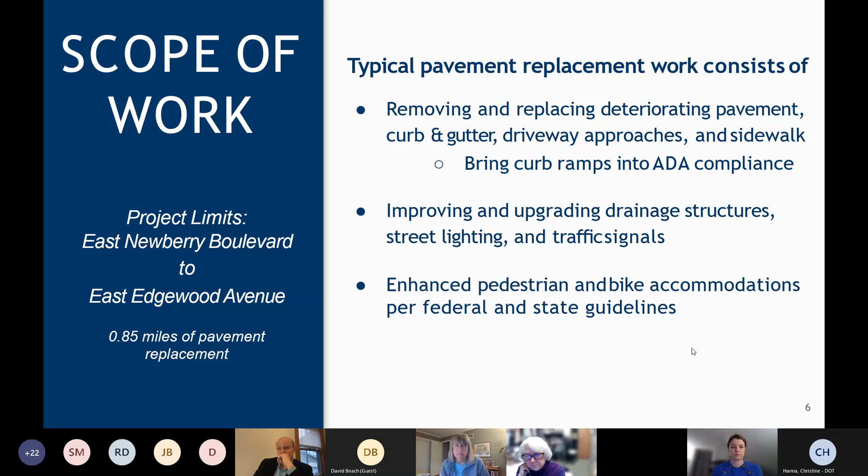So we're going to be talking about the cost so everybody's aware of where it stands today. The current construction cost is between $5 to $6 million. From the design perspective, 75% of the cost is covered by the state and 25% is covered by the City of Milwaukee. Now for the construction cost, 78% is covered by federal and state funds and 22% is covered by the city, and this is due to the parking being covered by the City of Milwaukee.

Okay, so here's the project schedule. If we go back, like I just mentioned earlier, July 15 was the first public involvement meeting. And in January, we submitted the 30%, which is a very preliminary design phase of the project. Today we have 2 meetings, or this week we have 2 meetings. Today is the virtual, and tomorrow we're having the in-person public involvement meeting.

Also in October of this year, we'll be submitting the design study report and the environmental document. I just want to emphasize, tomorrow the in-person meeting is going to be located at UWM campus from 6:30 to 8:30. We'll have a handout and some notes in the end in the chat box.

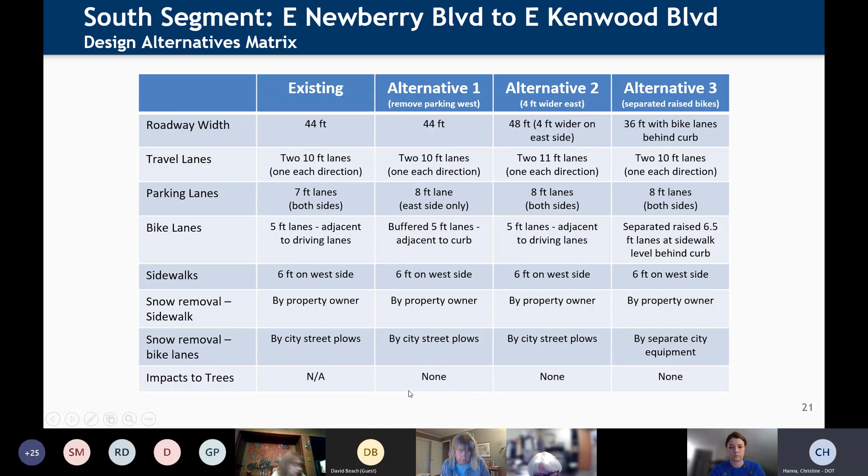So this is where we come in. I went a little too fast for this, but I want the majority of this meeting today to be focused on your feedback. How would the proposed design work for you? What did you like about it? What didn't you like about it? Is there anything you wanted me to go back and ask more questions about? Does this proposed design reflect what we heard from you at the first public involvement meeting last year?

Do you have any information or comments regarding the historic preservation that we may not know about, or additional feedback, or questions in that regard? Also, which design alternative for the south segment would you prefer? Because the north and middle don't really change - it's the south segment that has the three alternatives we just discussed.

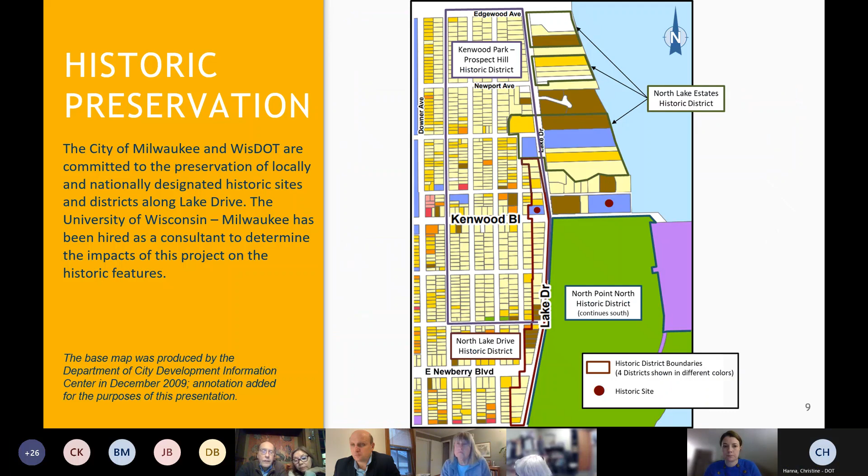We actually looked into that. Let me just go to the slide. You're talking about the north segment, correct? Unfortunately, we looked into that, but the trees as you see them today have deep roots, so anytime you disturb that area, you put it at a higher risk of the roots being impacted, and therefore those mature trees will no longer exist. So it's a higher risk, and we made sure to have enough width that complied with state and federal guidelines.

So the shared parking and bike lanes on the road are safer and more user-friendly, I should say. We have incorporated a separated bike lane where we actually can; otherwise the impact will not be good. And finally, like others have stated, we really don't want to widen the road if we don't have to, because we want to also address the reckless driving going on in that segment. So there are a couple of reasons why we have avoided that.

I don't know if Sam, do you want to add anything else I may have missed from your design perspective? Yeah, one thing you said that's pretty accurate is that the moment the curb is removed and we move it into the terrace area, the root system of these mature trees grows all the way to the back of the curb.

If I may add, is this the same Helen that I replied to in an email the other day? Yes. We pretty much tried to explain the city's approach with this situation as well. The Lake Drive roadway has been concrete for a long time until it deteriorated to a point where maintenance was required, and at that time we overlaid it with asphalt. The combined life for the entire project exceeds over 40 years, and if it were not for the concrete, we wouldn't have come anywhere close to that long of a pavement service life.

Throughout the entire city, it's a typical process that when we remove the existing pavement, it gets resurfaced or replaced with concrete. Then at some point when the concrete deteriorates and maintenance becomes a regular problem, we overlay it and extend the life by an additional 15 to 20 years. So this is the kind of cycle we go through. Some of that was explained in the email response I sent you the other day too. Yes, and thank you for doing that.

Shorewood, Whitefish Bay, and even Fox Point all put asphalt. So how does it even look, with this little stretch of concrete and then the rest asphalt? How do you see that?

If I remember correctly, that portion in Shorewood and the northern communities on the same route still has a concrete base. They milled the old asphalt and put a new asphalt layer on top. The next step would be that they come to the same process we're trying to do now: remove the entire pavement and start from scratch. So what you saw, that project done in the last couple of years with asphalt overlaying, had a base underneath that was originally concrete pavement. Eventually there will come a time when they do the same thing with concrete pavement, as I understand it.

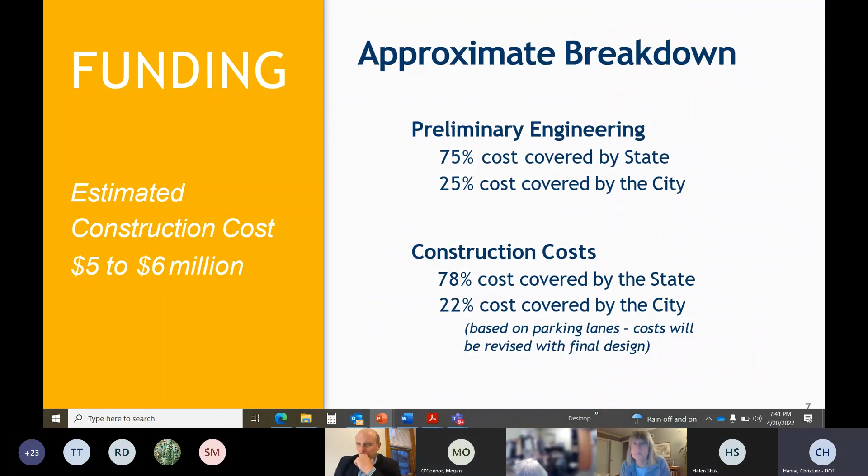Another question in the chat from Michael: why does parking get priority over a safer bike facility? I'm sorry, can you repeat that again? Yes, sorry—why does parking get priority over a safer bike facility? Where did that—can you point me to which one we're talking about? Which segment, Doris? It's from Michael in the chat box, asking why parking gets priority over a safer bike facility. I think it's likely in reference to the area north of Kenwood, where you said the parking study wouldn't justify the elimination of a parking lane. Thank you, Alderman.

This is the segment we're talking about, correct? The south segment? No, I assume the question is about north of Kenwood, because earlier someone had asked why not do a similar treatment there, and you said the parking study allowed it south of Kenwood, but not north of Kenwood.

We cannot just go ahead and eliminate parking and disregard its use for not just the locals, but any other commuter out there. At the same time, we are providing a safe bike lane with a buffer between the driving lane and the parking lane, 3 feet on each side. It's just pavement marking, so typically they have about 8 feet throughout that segment to travel safely.

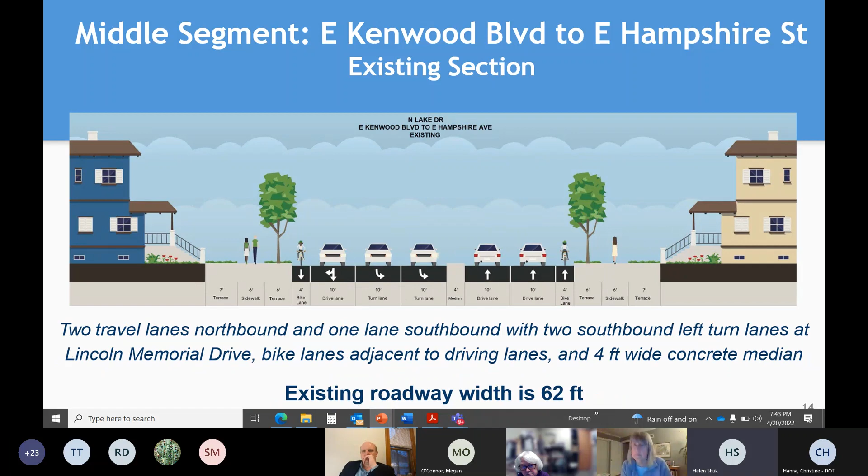I'm trying to look for it. Hold on. Sam, do you know which one they're talking about?

They're talking about the section between Edgewood and Kenwood, and for example, the north segment Hampshire to Edgewood: the bike lane existing today is 4 feet wide, and it's going to be widened to 6 foot. That is a big improvement. We come up with the additional room to reallocate to the bike lane because we eliminate one northbound lane entirely within that stretch.

Again, before the striping, there was no marked bike lane in the entire stretch. So it is a big improvement in class compared to what has been out there a couple of years, and now we continue to improve all these bicycle facilities whenever it is doable.

Correct, Sam. And like I stated originally, Alderman, at the beginning of that presentation, DOT's goal is to balance for all the users using this road safely and efficiently. So we understand parking may not be a priority to others. However, if we cannot provide adequate bike lanes, width-wise acceptable and safer, then parking will be eliminated. But in this situation, as you see and Sam just mentioned, we were able to do so.

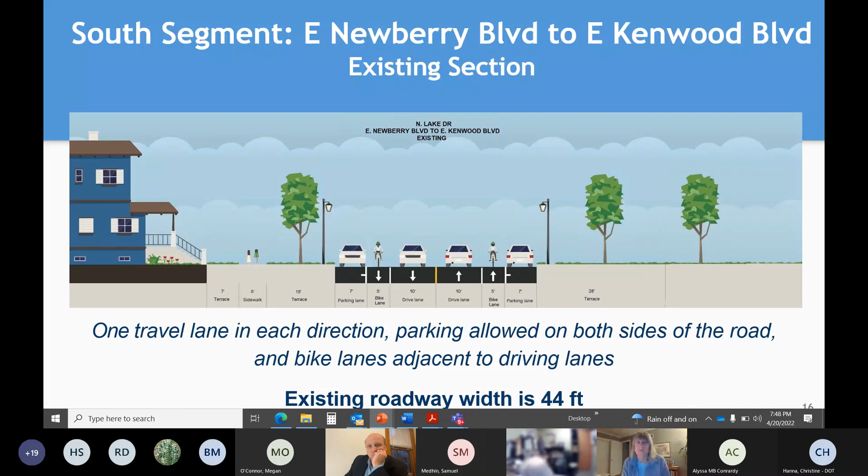Okay, we do have a couple hands raised. Alyssa, if you can go ahead and unmute your microphone. Hello, I just wanted to go back to that northern segment. I was wondering if maybe I missed it, if there's an alternative that puts the bike lanes inside of the parking, where it would go car, parking, bike. I didn't see that on the northern section, so I was curious if that's not being considered, why it's not being considered. Thank you.

I'm sorry, you went a little too fast for me, can you repeat that? Sure, no problem. So in this northern section, I didn't notice, and maybe I missed it, the bike is in between the parking section and the actual driving lane. Is there an opportunity to consider putting the bike lane closer to the sidewalk on the inside of the parking lane? And if not, I was just curious why that's not being considered.

Okay, that's actually a very good question. The reason why they are located between the traveling cars and the parked cars is for biker safety. Because if we put the bikers outside between the curb and the parking cars, they can be very easily missed. So they get protected from cars going in and out of the lane to park. The bike has to maneuver around the parking cars, but driving lanes are moving vehicles, and they stay within their lane. That's why there are minimum and desirable widths for those lanes, ensuring a safer lane for parking, bike, driving, left turn lanes, whatever the usage may be.

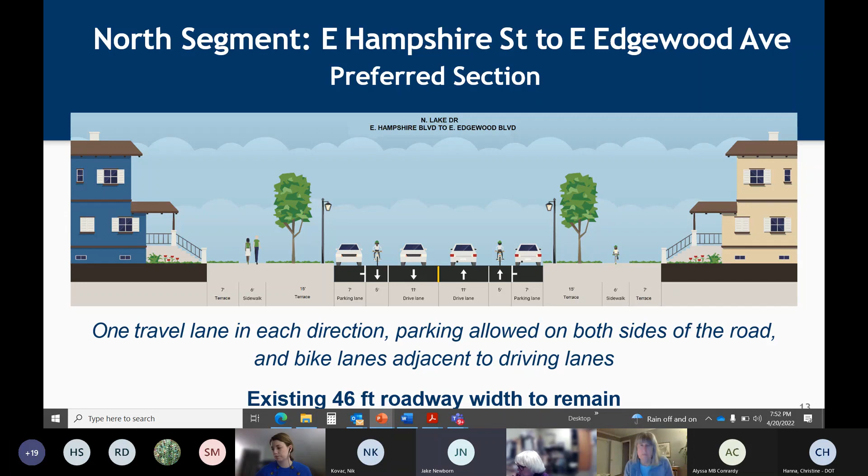Hi, good evening folks, thank you. I've been following along in a lot of the chat comments, and part of my question was already answered by the alderman, and I think requesting a parking study of the northern section is extremely warranted. I look at that parking study again, and it seems like a lot of zeros and ones, and then obviously two, that Friday section, there was a big jump. So for a very, very short period of an entire week, half of the roadway is being accommodated for that. So is there any qualitative data you guys have on what's causing those huge jumps? Was it a special event or something?

No, those were done through standard weekdays and weekends. We avoided doing it during holidays or any sort of celebration to avoid that high volume peak. That's why they were divided into three timeline segments: from 7 to 11 a.m., 11 to 5, and afterwards.

Right, I understand what the graph says, but what we see is a huge jump only on Friday between 5 and 10, and then it's half that on a Sunday 11 to 5. None of the other weekdays have that big a jump that Friday has in the evening. So I'm asking, did Alderman Kovac throw a fundraiser party or something that night? But there's something there that was going on, so I'm just asking about that.

I understand what you're saying. From what I can decipher from the report and spreadsheet in front of you, it's the weekend pretty much. This is where the majority of the parked cars came out from, especially Friday night from 5 to 10, plenty of cars will come there. Sunday nights, pretty much from 11 to 5, is going to jump. That's why you see Monday through Thursday is almost negligible.

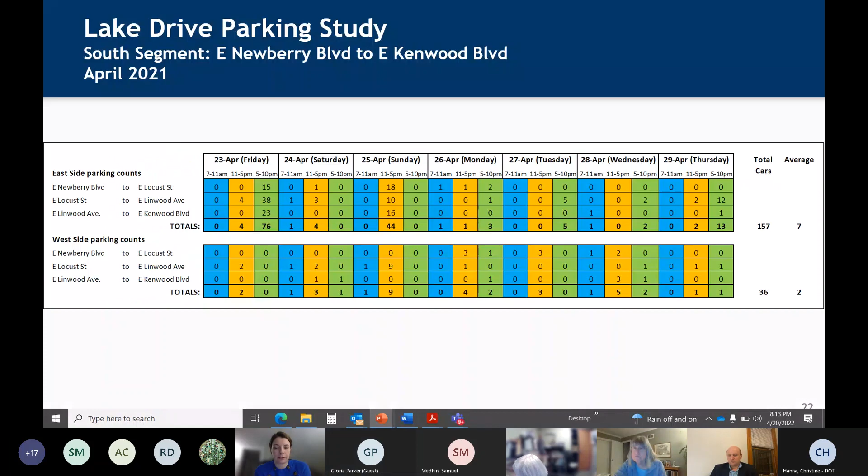Just to continue the conversation, for cyclists riding north from Newberry, it looks like it's a very short distance from Newberry to Kenwood for a bike rider. How do you see cyclists going from a lane to the right of parked cars and switching to a lane to the left of parked cars when they get to Kenwood? So if you can kind of talk about that transition we have between the two segments.

That is a very good question. Actually, we looked into that, and we are going to mitigate it so the cyclists and the parked cars have a transition area, so it will be visible for both entities to cross each other in a safer manner. It seemed like a shorter distance, but again, we have to work with what we're impacting, negative or positive, and what's not. It's just a balancing act. There will be transitions between the middle segment to the south segment and the north segment to the middle. So it's not just a slash cut, there will be transition areas, and we'll have those full details of the transition layout at the next public information meeting, just to let you see how it looks.

So Christine, I have one question, comment. The segment north of Kenwood, how is it going to match Lake Drive north of Edgewood into Shorewood? I'm not sure of the final selected alternative for the Shorewood part of the Lake Drive segment. So whatever we're doing over here, similarity wise, is it comparable with the segment going north past Edgewood?

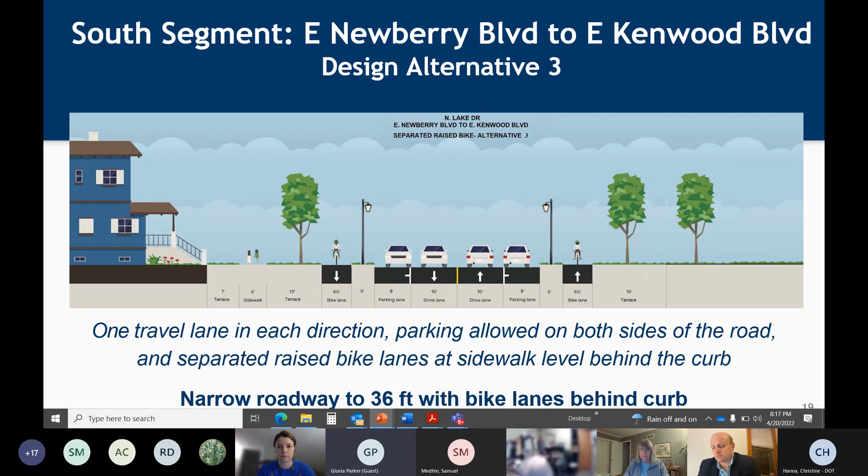Yes, I just wanted to make a comment about the area at Hartford and Lake Drive where we're talking about people crossing the street. In my opinion, bump outs do not slow the traffic. I think the only things that do slow traffic are these flashing lights when people press the button and the yellow lights start flashing. They have it in Fox Point and Whitefish Bay, and the cars do stop. The signs don't seem to work, as other people have mentioned. I don't think bump outs particularly work, and they also make it hard for the snow plows, because we have bump outs on Lake Drive, on Locust, and that isn't very satisfactory either. But I think that flashing light is what really is needed at that point, also at Linwood and Lake Drive.

Actually, that's an excellent point. So just to let you know, as we haven't finalized our design analysis and approaches, a flashing light activated by pedestrian crossing is something we're also looking into adding in the Village of Shorewood project, north of the Edgewood limit. I think this is something we can work on for both segments, so drivers are used to knowing when to stop, not just looking for signs more so than flashing lights. I think that will be a good mitigation between both projects. So this is something very positive we can add to both projects. Thank you.

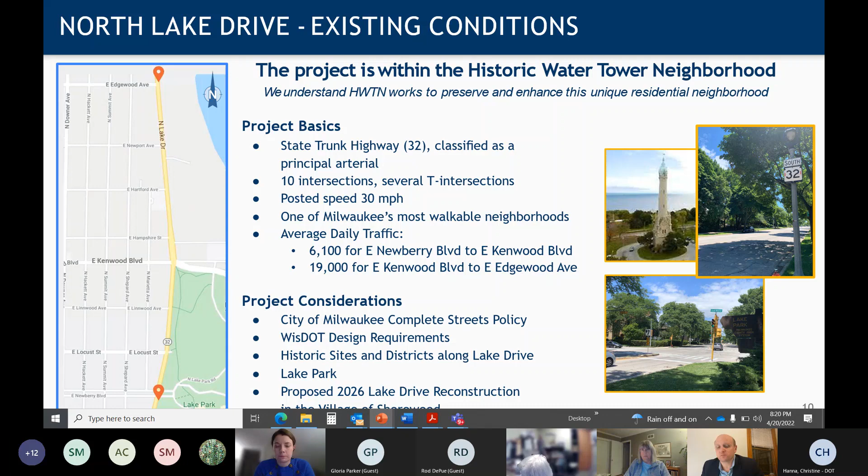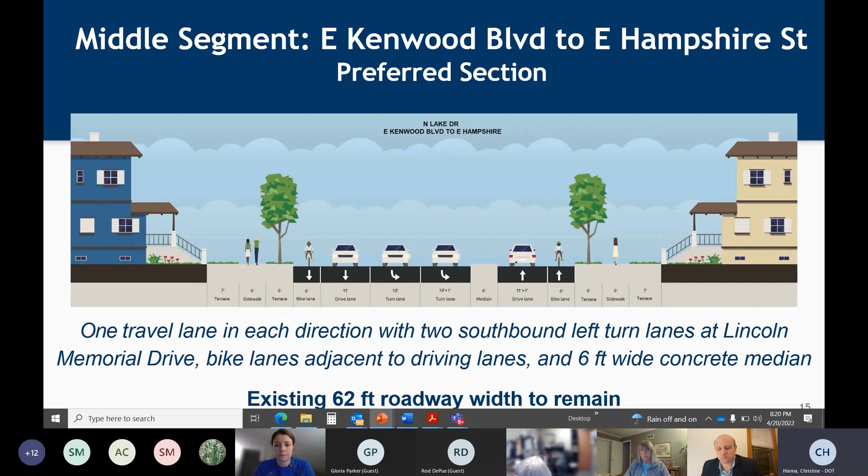Just a note from Sandra, can we provide a traffic plan view versus only sections for traffic going both north and south? I don't have any plan view. Actually, on the exhibits we're having during the in-person meeting, we'll probably have those, but not on these slides. We can do that next time. Okay.

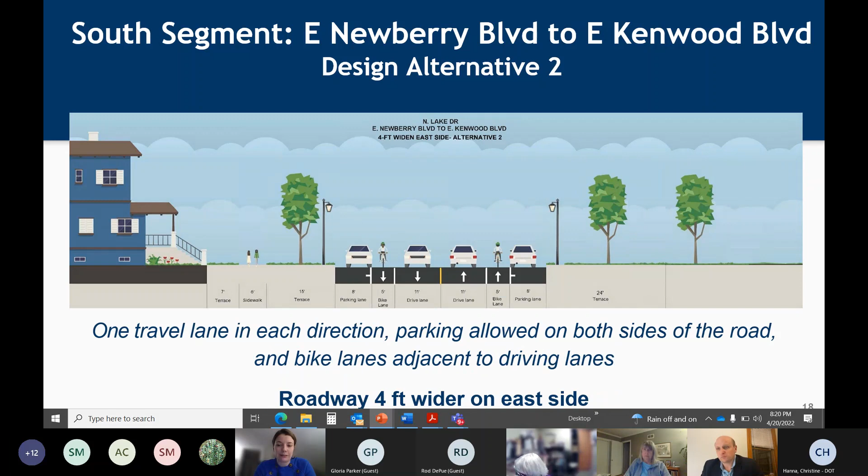David Loken said he would ask that DPW and WisDOT go observe the lights at 41st and Oklahoma for an example of them not working, meaning the cars aren't obeying the flashing lights to stop for pedestrians to cross. I want to add something. I understand and I'm confident 100% of what he's saying, I really don't have to go out there and observe, I am confident of his statement. However, it should be a balance between what the city and DOT can do versus just a matter of enforcement. Sometimes enforcement should be the key, not just because we follow regulation and policies, both federal and state, and these are years and years of research to come up with these guidelines. But like a roadway needs maintenance after you build it, enforcement needs to be held in order for people to obey the laws. So maybe this is another approach the alderman can discuss with his other resources.

There's a comment saying that design drives behavior, not enforcement, which could be a whole longer conversation, and we have about 8 minutes left in this meeting. So let's move to the contact page, so people have our information and know how to provide comments. Great, thank you.